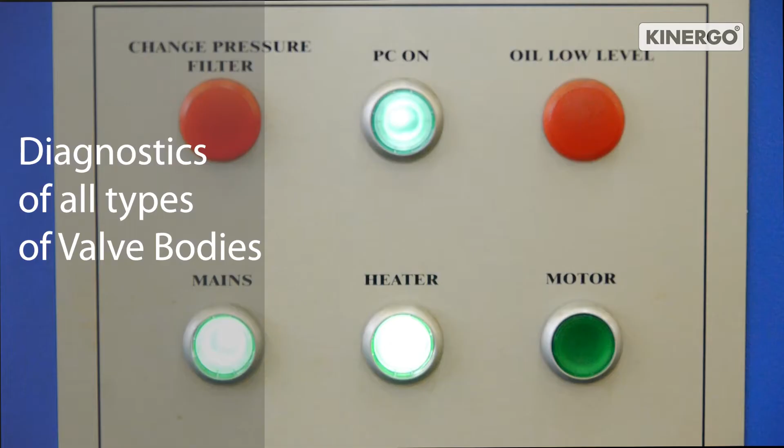The valve body testing machine VBTM-K was designed for valve body testing and diagnostics without installing it back on the car. It allows you to perform diagnostics of all types of valve bodies with no more than 16 solenoids. The hydraulic part of the VBTM-K stand includes a high pressure pump, oil heater and high precision sensors.

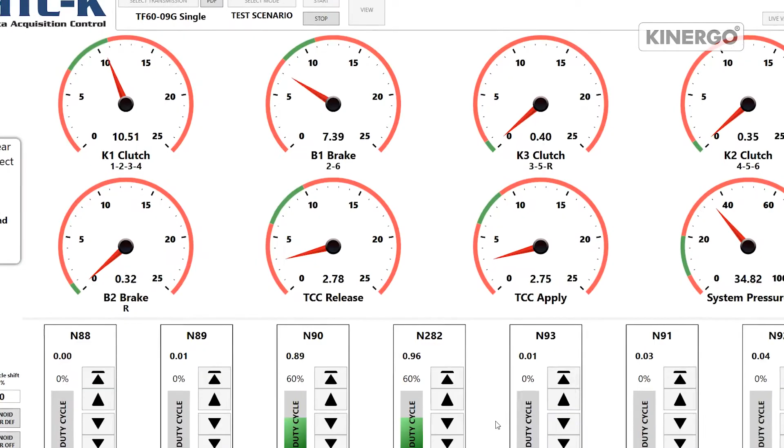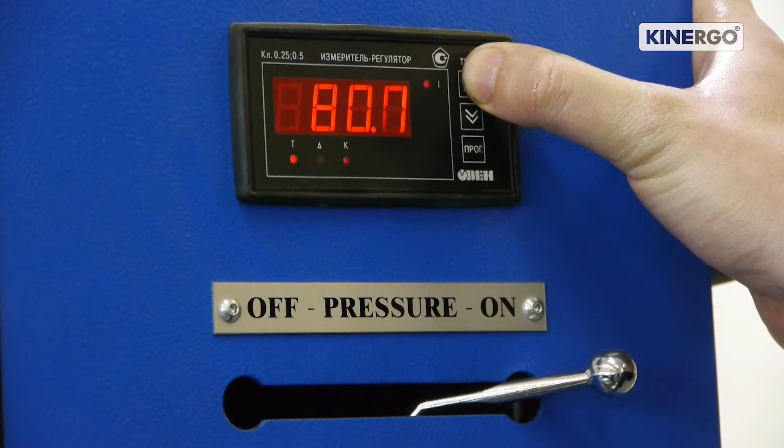Software and controller imitate the real-time work of the automatic transmission in different modes, allowing a flexible approach to test parameter selection. The operator can adjust temperature and pressure of ATF, number of working cycles for a chosen scenario, and control electric signals sent to solenoids. A high level of synchronization of valve body control processes and of data reading ensures high precision of the comparative analysis method.

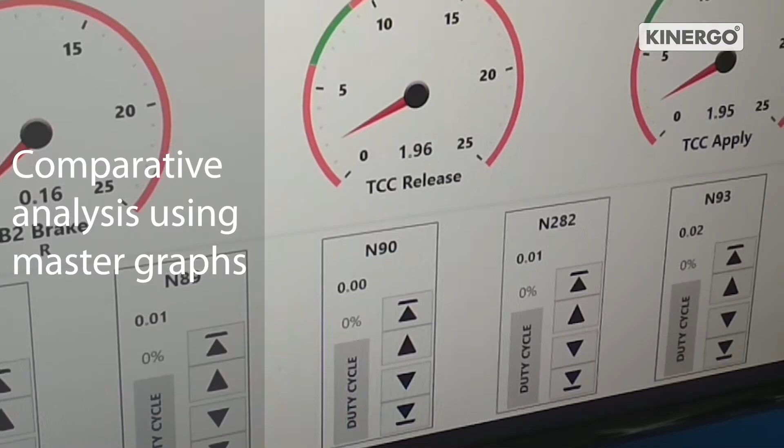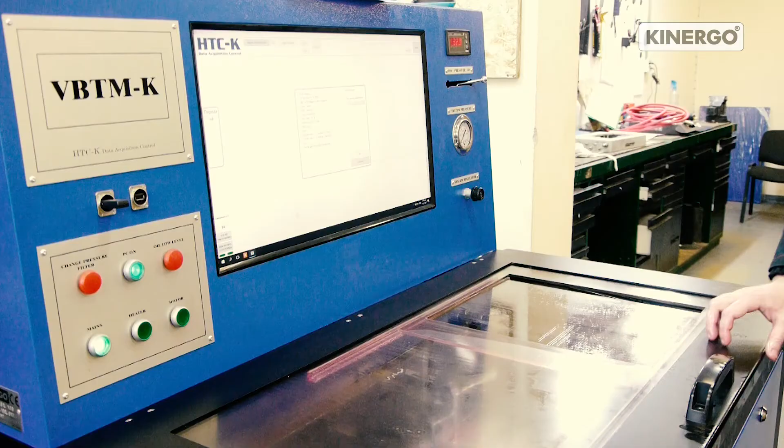To perform the analysis, you need to compare the data from your valve body to the data of the equivalent one, presumably performing well, or the new one, which is better. Let's see how it works. To perform the tests, we are installing the valve body on the corresponding test plate, connecting it to the stand's hydraulic system according to the connection scheme. The solenoids and the sensors are connected with special wiring.

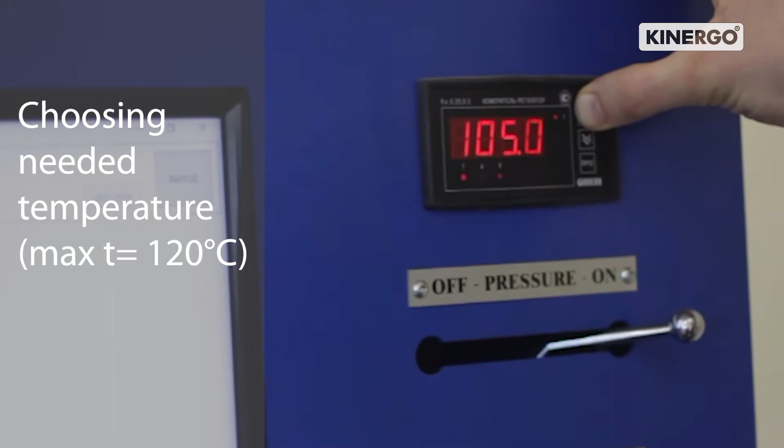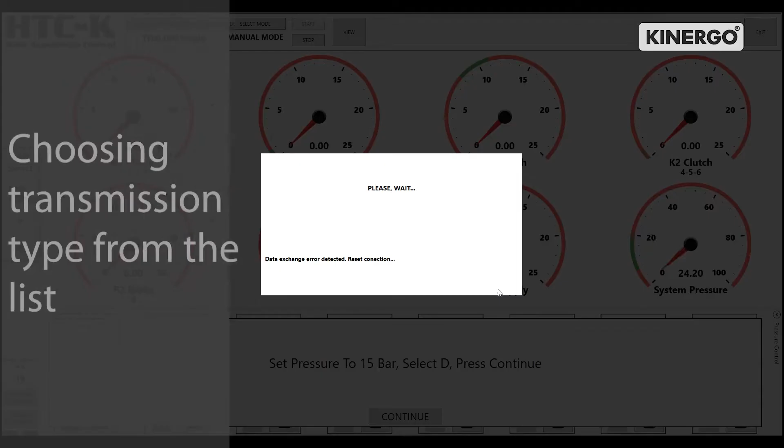Switching on the power and the heater. Choosing the needed temperature of ATF for the test; the stand can heat it up to 120 degrees Celsius. Starting the oil pump. Choosing working ATF pressure. Starting the software. Choosing valve body type from the transmissions list. The software allows you to use different modes: test solenoids, test scenario, manual mode, auto mode and auto mode 2.

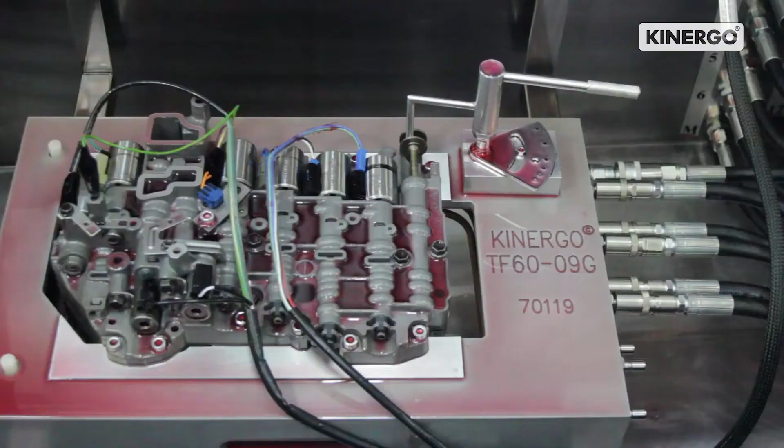The first mode, the test solenoids mode, checks the valve body wiring connections. While performing the test, the controller checks the current value on solenoids and lets you know immediately if it is too high or too low. This test allows you to diagnose such malfunctions as a chain break or short circuit in the valve body at an early stage. The solenoid testing was unsuccessful.

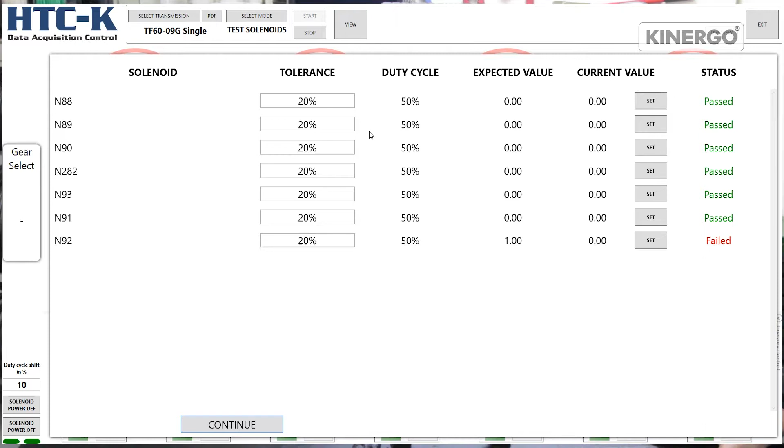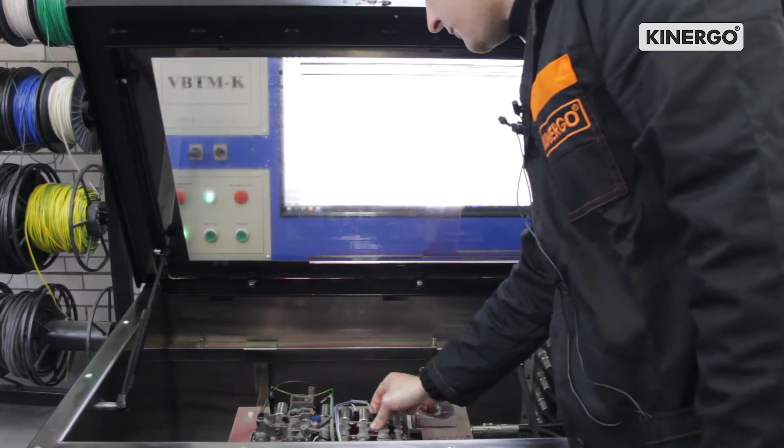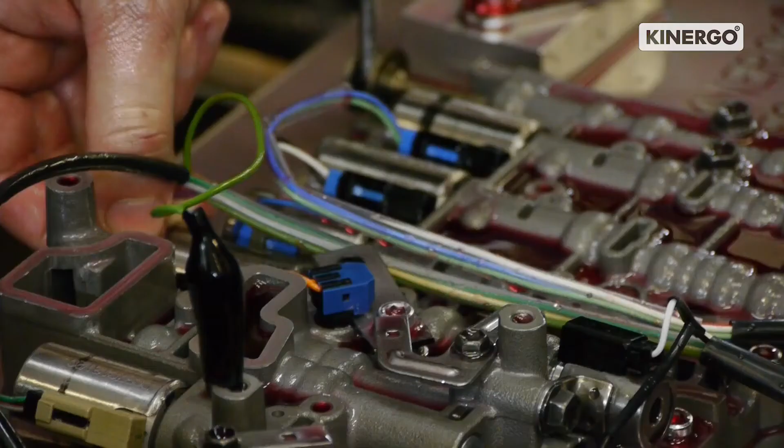Let's find out why. The first possible issue: wrong wiring connection. You should start by checking if the connectors are properly plugged. The issue was caused by the N92 connector. It was not connected. We plug it in as it should be until you hear a click, and then we start the test again.

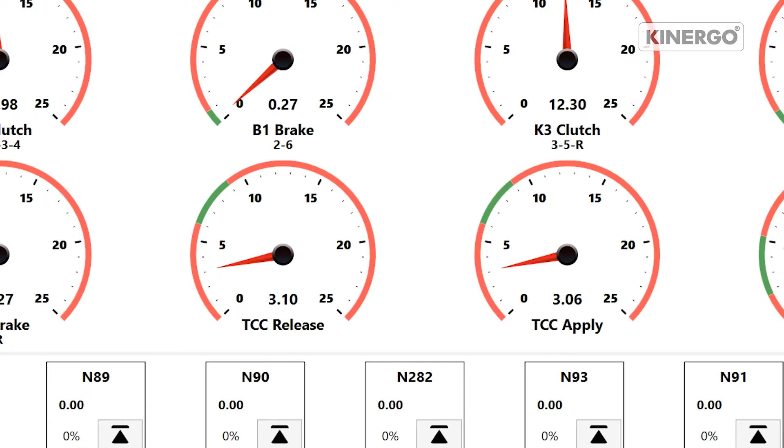Auto mode was introduced for heating the valve body up to the working temperature and filling all its channels with ATF. Before starting the test, it is highly recommended to warm the valve body up by repeating the auto mode for 10 to 15 minutes.

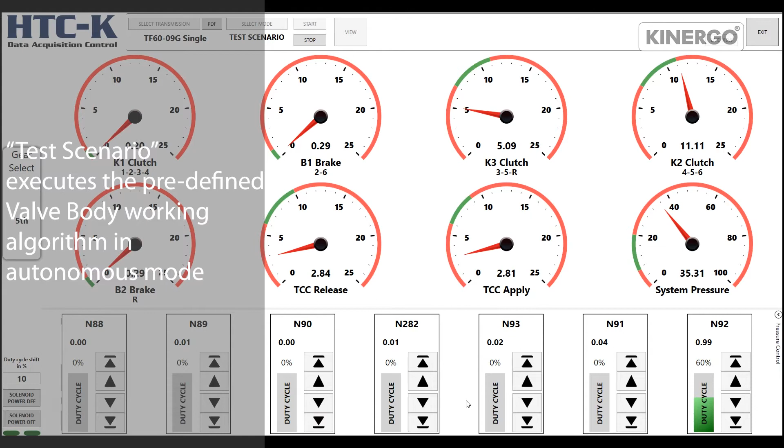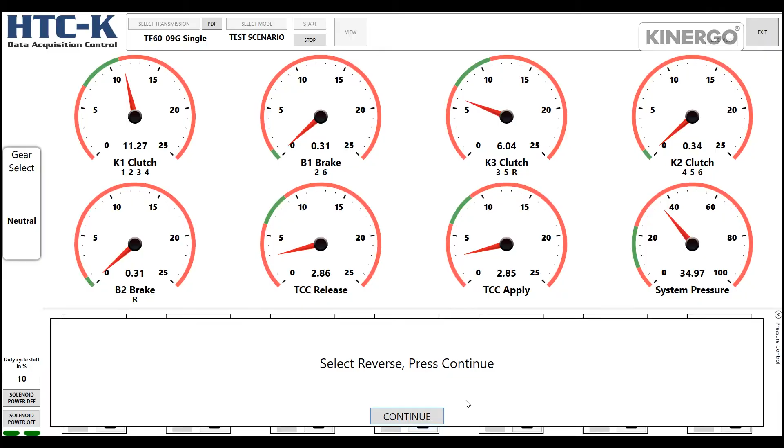This mode executes the predefined valve body working algorithm in autonomous mode, imitating as accurately as possible the car accelerating from start and shifting to the upper gears, as well as the car decelerating in a reverse gear. You have to choose the scenario for the transmission test from the list. After starting this mode, you need to follow the instructions appearing in notification windows.

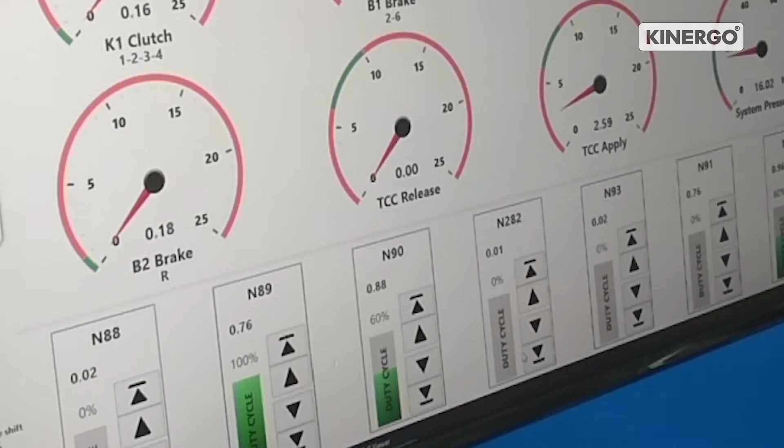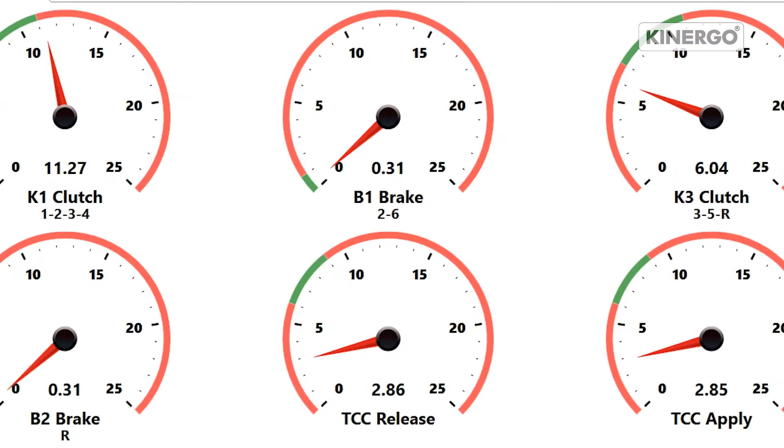All the readings are displayed simultaneously while the test is performed. The software interface displays the readings in the form of analog dial and parametric indicators. For your convenience, the readings are colored green if operating within the normal range and red if not. In the lower part of the screen you can see the parametric indicators representing the current value on working solenoids.

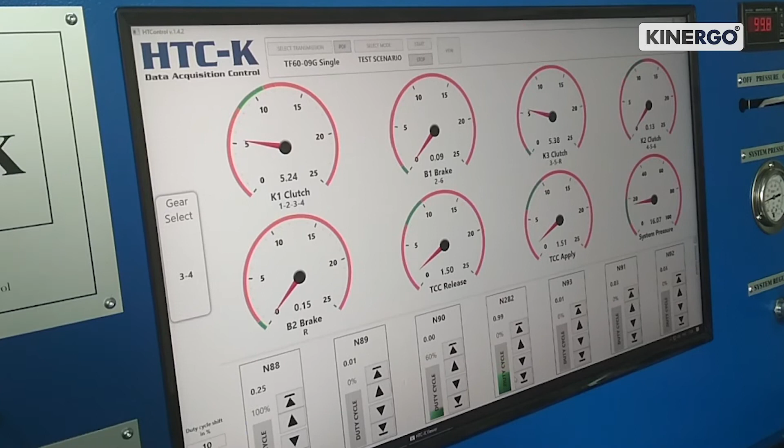When the test is over, all the data is processed by the controller and displayed on the screen in the form of separate graphs for each valve body channel. By comparing the actual valve body graph to the master graph, you can identify the exact channel where a malfunction or a pressure loss appeared and under which conditions the malfunction took place.

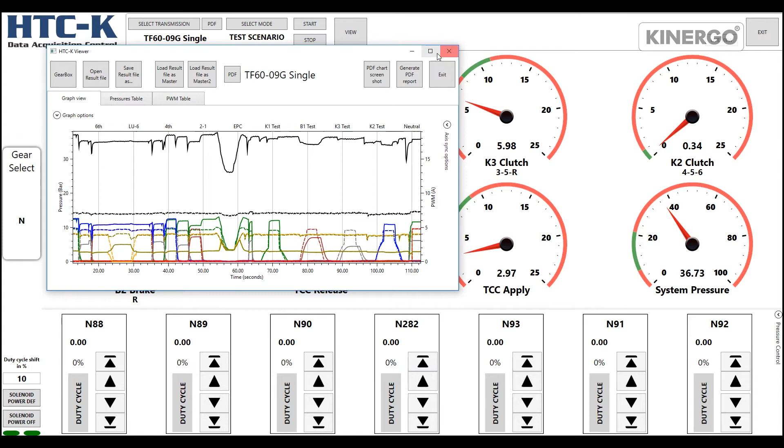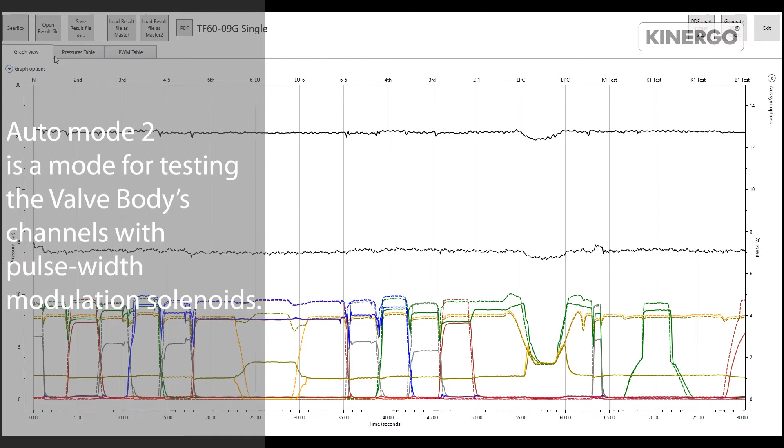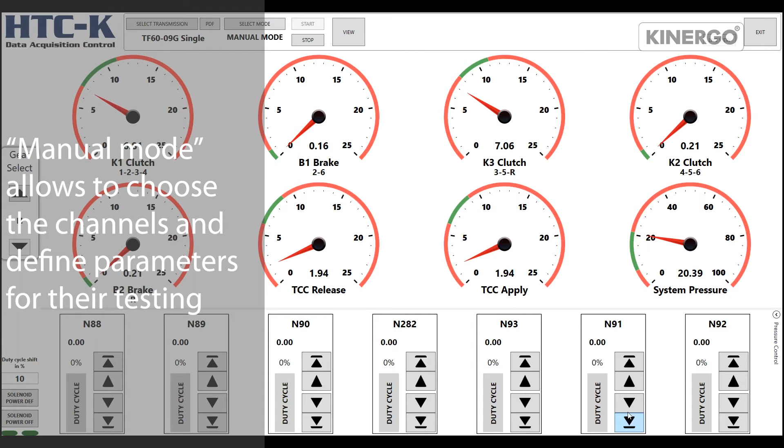Auto mode 2 tests the valve body's channels with pulse width modulation solenoids, which allows you to test their performance without removing them from the valve body. Manual mode allows the operator to choose the channels he considers necessary and define parameters for their testing. An experienced specialist knowing his way around valve bodies can easily make a quick check and find the problematic area using this mode.

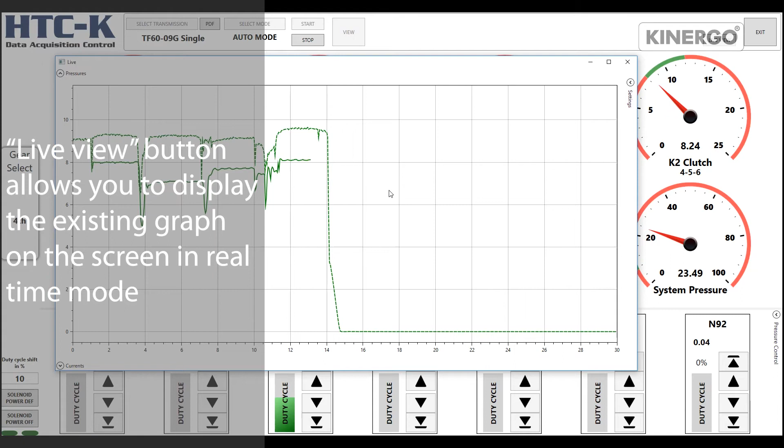The software allows you to display the existing graph on the screen in real time while executing a test or scenario by just pressing the Live View button. The operator can choose separate channels he considers necessary.

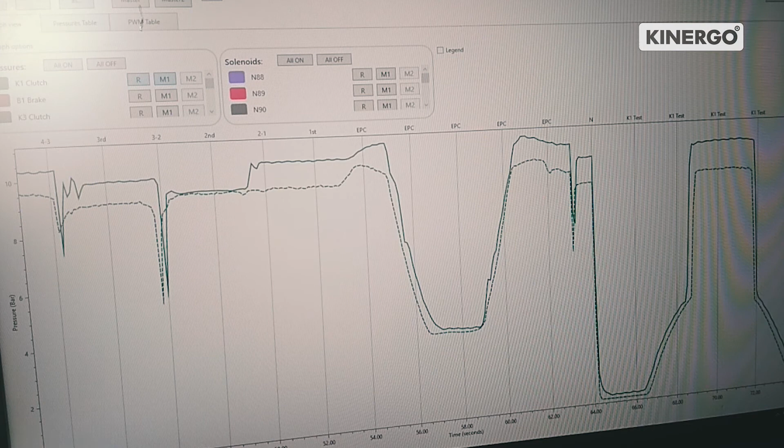After the test is done, we have the data in the form of graphs. We actually can see some deviation on the K1 channel. The output pressure we got is marked by a solid line, the master graph is a dotted line. As you can see, they do not match. This could lead to the first gear shift delay and an incorrect 2-to-1 gear shift. The test is done and the issue is obvious.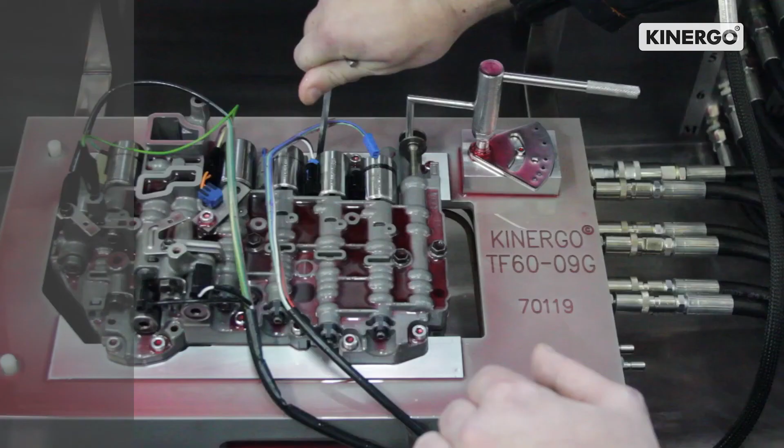As you see, the VBTM-K helped us to find out the real cause of the automatic transmission malfunction while reducing to a bare minimum the time and material resources spent on defining one among many potential causes. After the repairs of the valve body are done, the stand allows you to check valve body functionality without installing it back on the car and doing live driving testing.

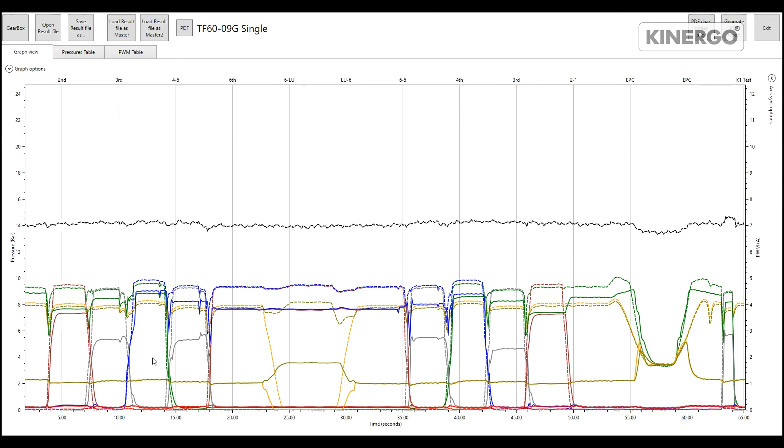The VBTM-K stand is a universal tool for testing all types of existing valve bodies as well as prototypes. Our engineers can develop special software and any valve body test plates upon request if a customer provides us with a properly functioning valve body.